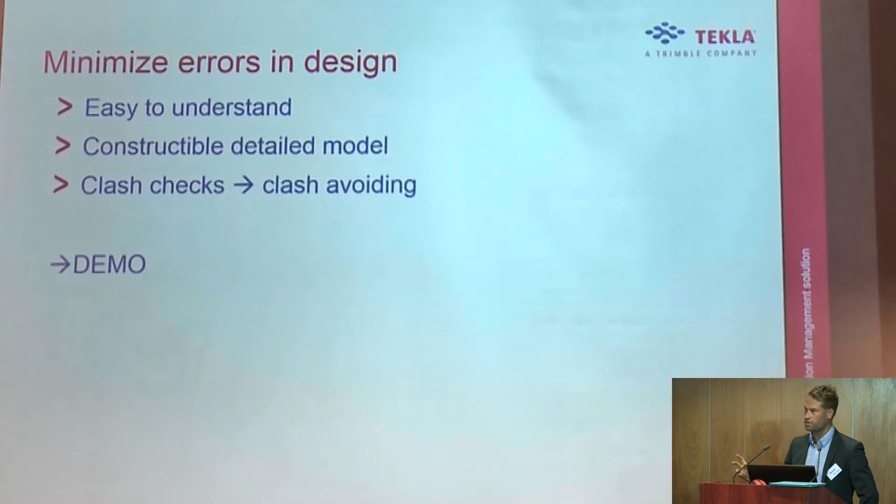First, in the design phase, we want to minimize the error. We heard already how BIM helps, but let's see my point of view about that. It's easy to understand, and also we need the detailed constructible models so we can see that everything fits together, and of course clash checks or clash avoiding, which I'm going to show you soon.

This is one real-life example, not a good one, so that's why I didn't write the project name and the project parties here. Every year we get a lot of different models in this Tekla BIM Awards, and this was a couple of years ago, and sometimes I want to get to know and check the models. This is the roof structures of one building.

We can see that the ducts and the wooden structures are clashing heavily. And if we look a little bit more, we can even notice that there is no easy solution for this. No minor changes, it should be some major change or something. And this was already a designed project, so we know that every project is not perfect.

But this other example, this year's competition, Ramboll Finland and SRV Construction, one of the largest general contractors in Finland, they had this Opinmäen campus project. Also a complex project where they commented that without modeling, it couldn't be nearly flawless design with the modeling. So with the model, it was nearly flawless.

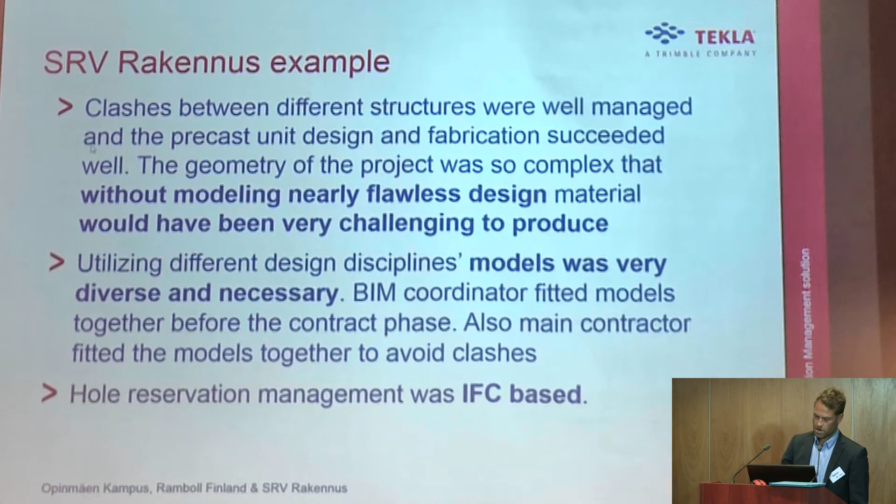The design team did the clash checks, and also the contractor put the models together, and everything was done by an IFC-based system. So here's some example pictures about this project. Everything's detailed, and of course everything fits together. You can see the connection joints.

And this is always the hardest part of the building, the HVAC machine room, top of the building. If you look, it's quite a small picture, but we can still see that there are no clashes. All the ducts are going nicely, but no clashes there.

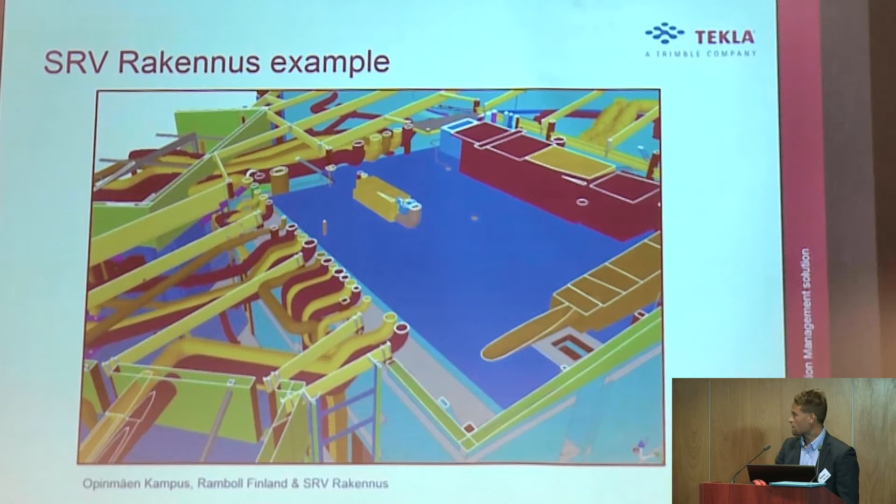But if you look at today's demo model, I have this Ilmarinen model here. It's a quite big project, fully detailed, everything was modeled. Let's check a little bit through how it looks like.

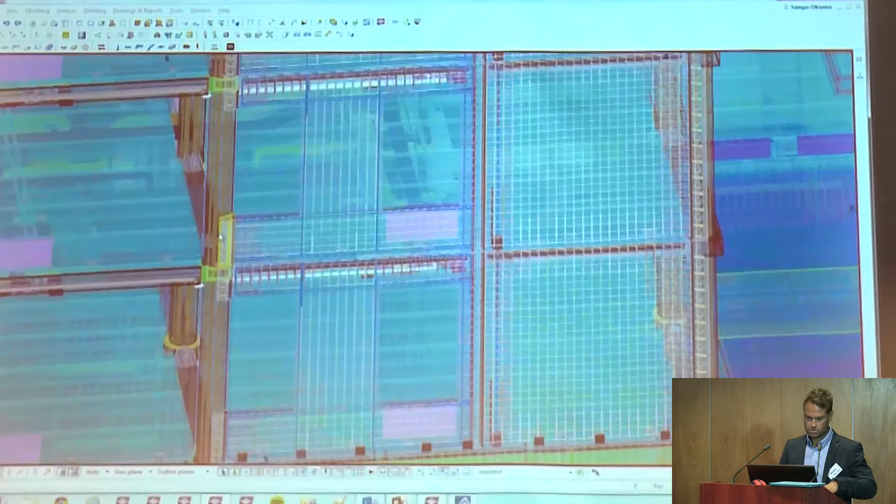Like I said, everything is detailed, so we can see that everything will fit nicely - all the cast in place, all the precast, all the steel. So it's a multi-material project. 3 office buildings in the first phase, maybe 2 office buildings more in the second phase, 2-story basement, and also HVAC and MEP was modeled.

And if we go look a little bit inside the project, we will see that, okay, it looks normal, everything's there. But what they used, the MEP designer and structural designer used this hole reservation, IFC-based hole reservation system in this project.

This is what I meant about clash avoiding. It works that way that the MEP designer creates a hole reservation in his or her own software that he's using, and then sends the IFC as a hole reservation to Tekla Structures. Then the structural engineer can accept or say that it's not, you cannot create a hole in this structure.

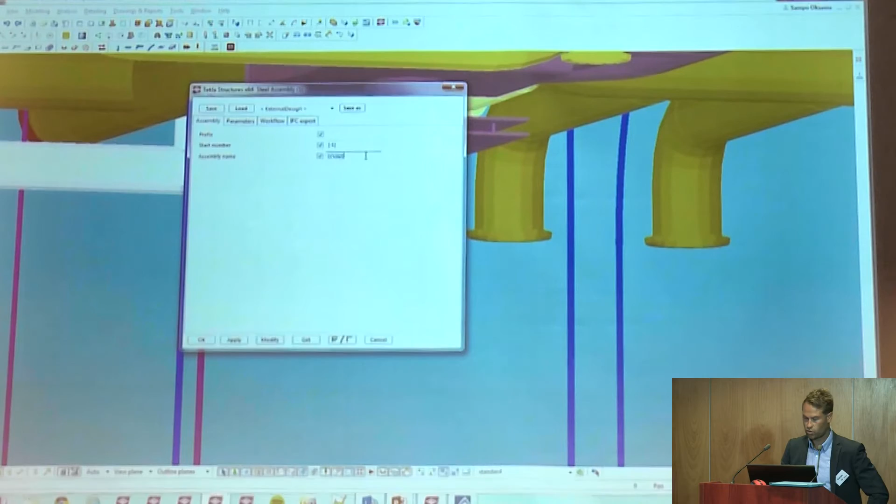Now we can see that this red one is the hole, and then we can see that the ducts go through the hole. We can even click it and see that it's a void - that's the name of the object when it's a hole. Using this, they can communicate and make sure that all the holes are in the correct level and correct location. So of course clash checking is needed, but this is like clash avoiding. If you use this system, you probably will not have that many clashes in the clash checks.

Okay, let's go further. First thing we need to build a building is a foundation, no surprise. But the problem is we don't have the drawings. I've heard this in many projects, that they can still start doing and planning the project. They have the model. They need to have some quantities, coordinate system, reports, materials, that the model can provide.

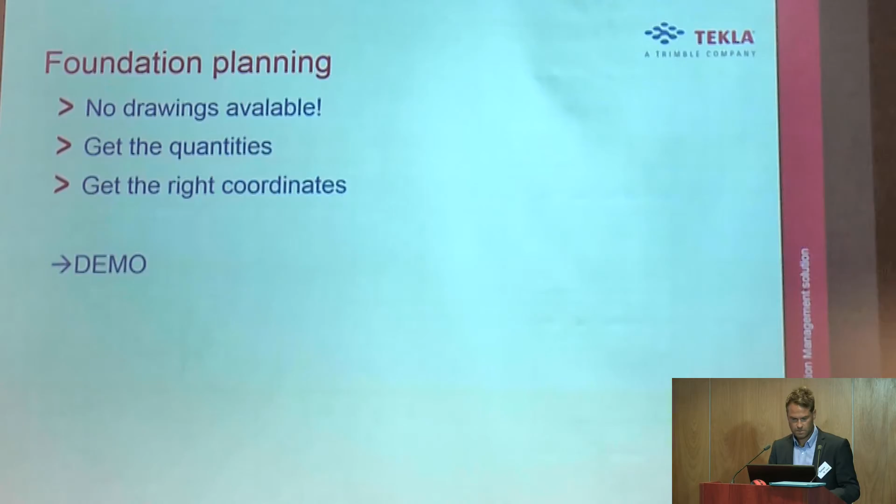So let's see an example. Let's continue with the Ilmarinen project. Let's hide the reference models and the rebars, and let's go deeper to the foundation. Like I said, it looks like quite a basic office building, nothing special, but this way is easy to understand.

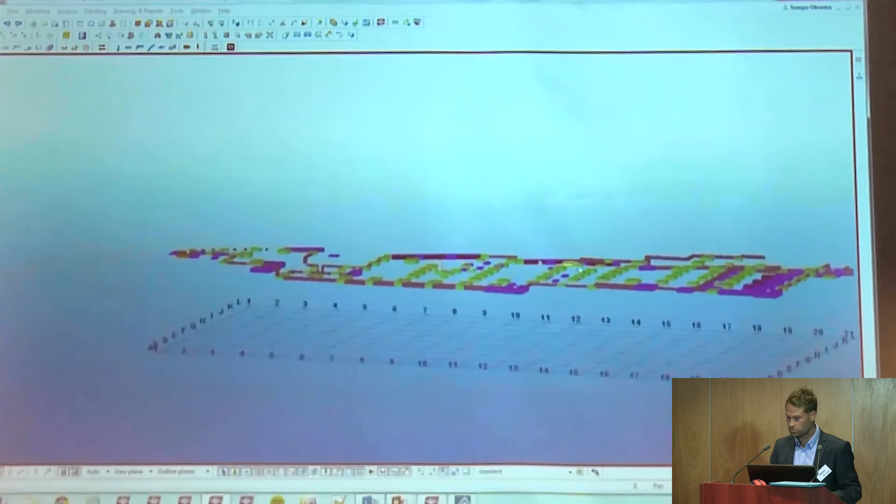Now we start going through the foundation and notice that there's quite a lot of different levels and elevations. And of course, that means there could be a lot of challenges on site also.

So first the quantities. Now I open the first tool that we now have in Tekla Structures 20 in all configurations. So if you're using Tekla 20, you also have the organizer tool, which is the quantity takeoff and information management tool. It's quite small there, but probably the idea will be the most important thing.

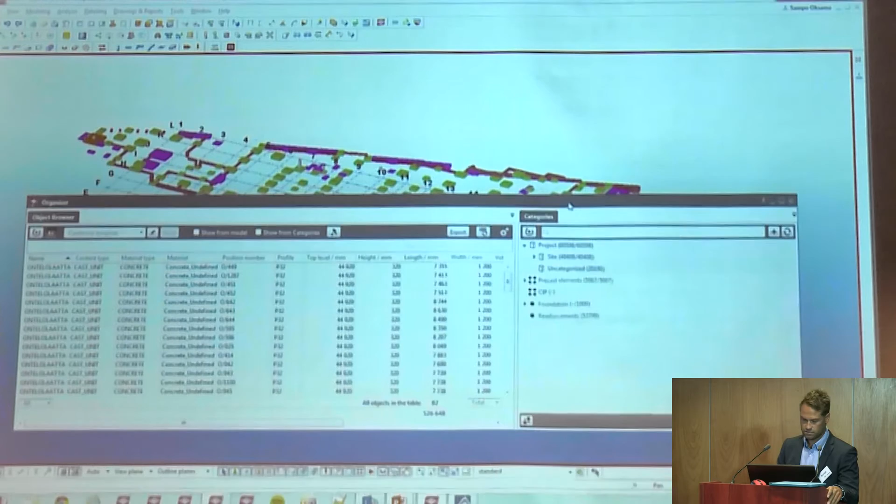So on the left side we have the reporting, all the objects, all the quantities, and on the right side we have the locations and groups that we can customize and create.

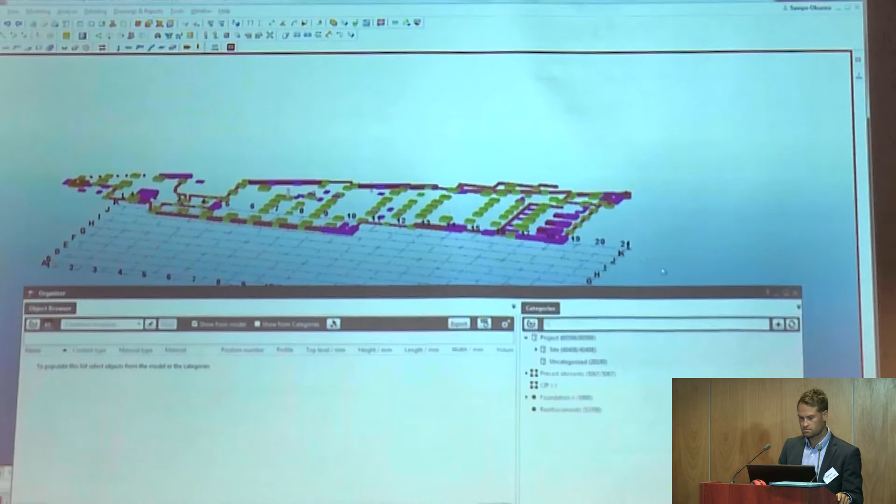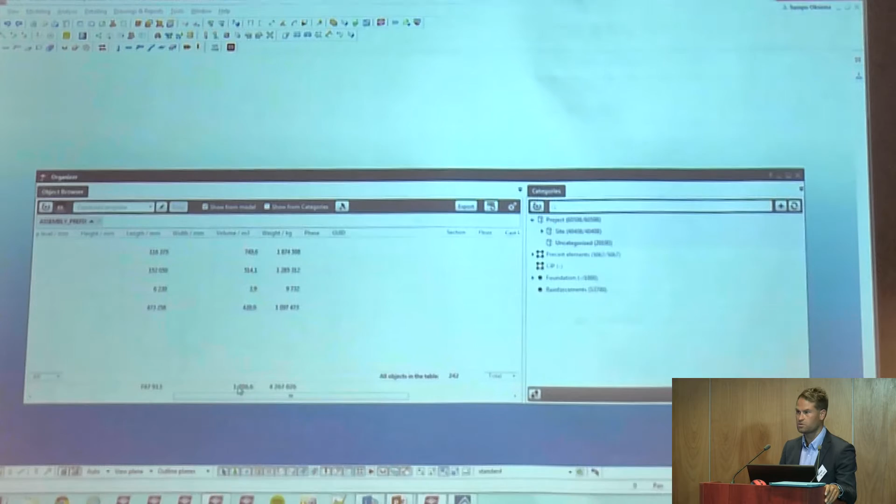So for example, if we want to quickly get the quantities, we can just select from the model. Let's select all the footings like that. Then on the left side, we can easily use the grouping tool and see. We have probably four different kinds of footings, and then we go and see, we're interested about the cubic meters, so 1,700 cubic meters there. So that was the easy way.

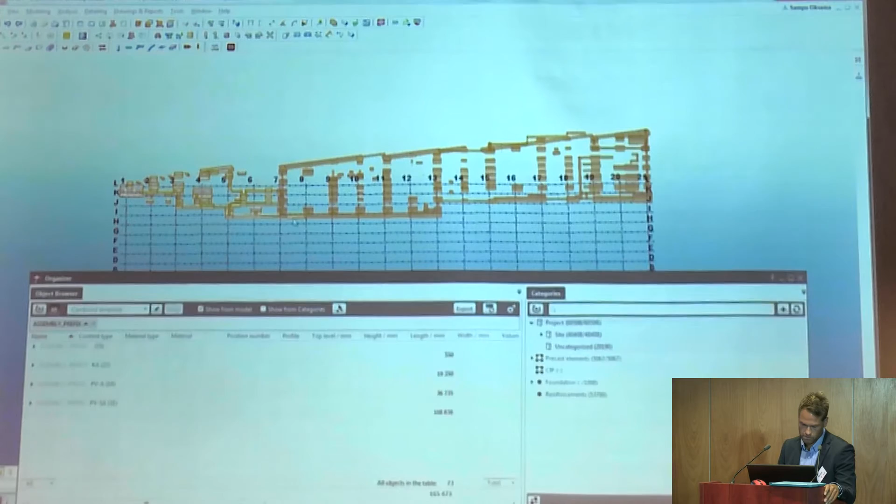Of course, we can start planning. Should we pour or plan this area first, see how much formwork there is, or how many cubic meters of concrete. So we can quickly take different kinds of quantity takeoffs from the model.

Okay, we're also interested maybe about reinforcement. So I can quickly create this group using...

Everything here is organized as rule-based, so it's based on, for example, filters. So if we say that these, based on the name, should belong to foundation, if there's a new object and it's called foundation, it will automatically go into that group. So it's rule-based, and that means it's easy during design, or when you have a new model, to check.

So I created a new group that will check all the concrete parts, and then the rebars. Let's check what kind of result we have here. You can imagine how long it takes to calculate all the rebars from this size of project, from the footings. Let's just wait a second.

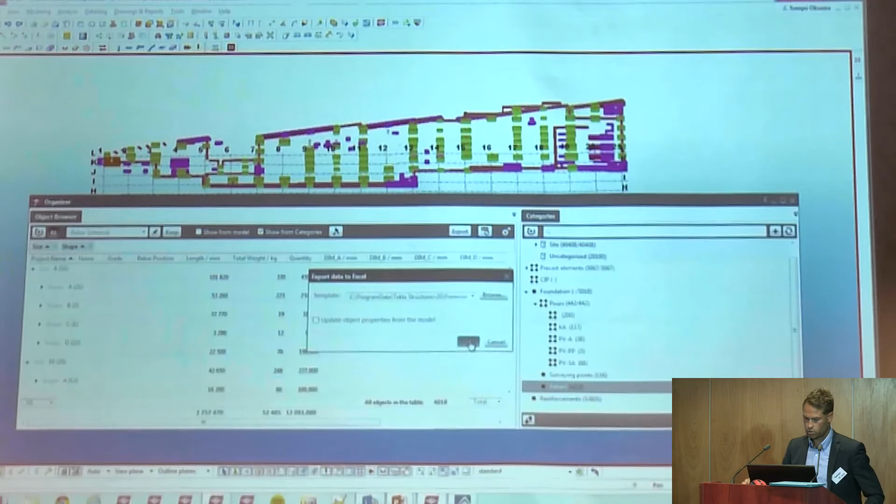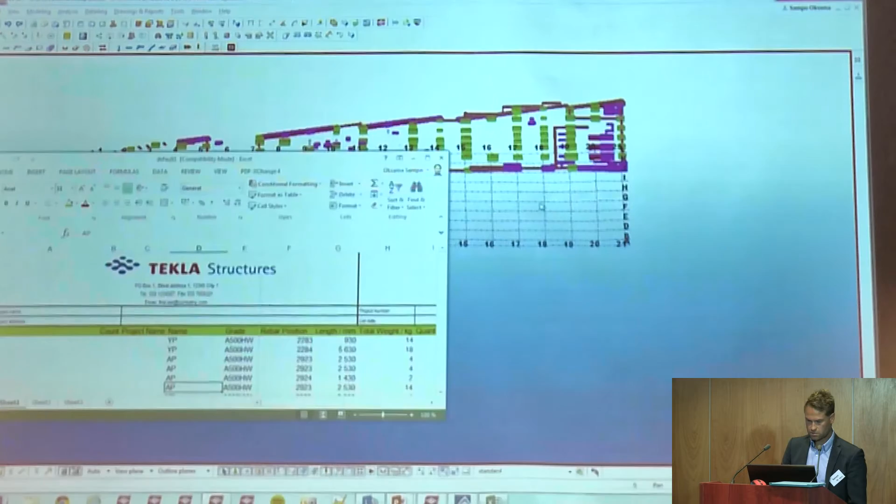Then I create a grouping based on size and bending type, and then, for example, let's export it to Excel. So here we now have an Excel sheet with all the rebars that we have on the footing. And we also have the grouping that we had in the organizer tool. It's still here, so we can easily see that, for example, size 16, we have 36,000 kilograms. So quite a lot of those rebars. Quick and easy reporting to Excel.

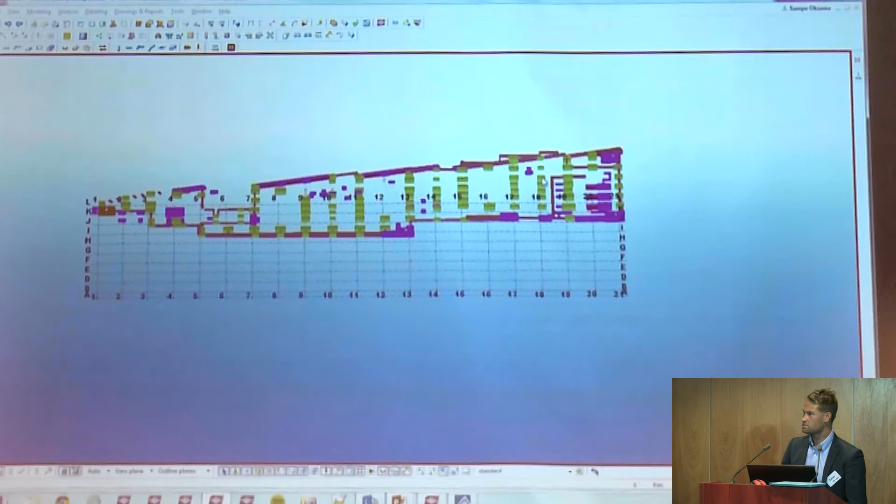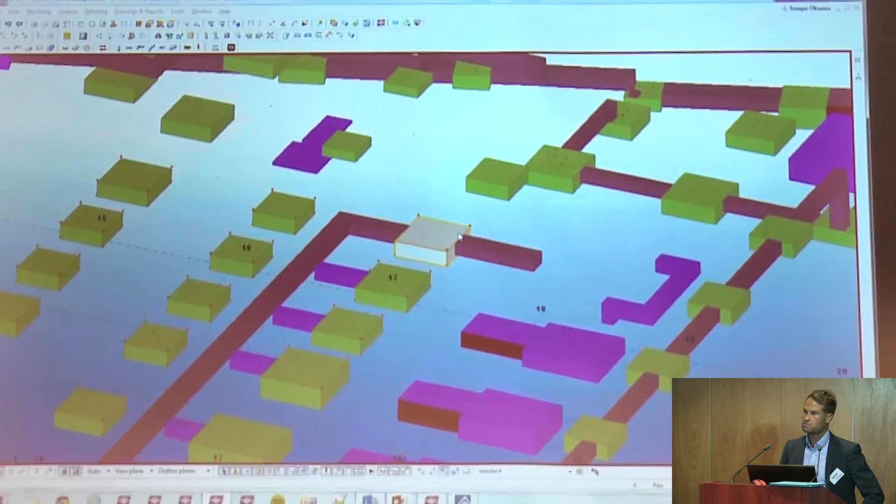And of course, I was talking about the coordinates, and PSD was also interested about this surveying point, measurement points. And like I said, in this project there are a lot of different levels and elevations, so that might help the construction site guys install all the formworks and rebars in the right location.

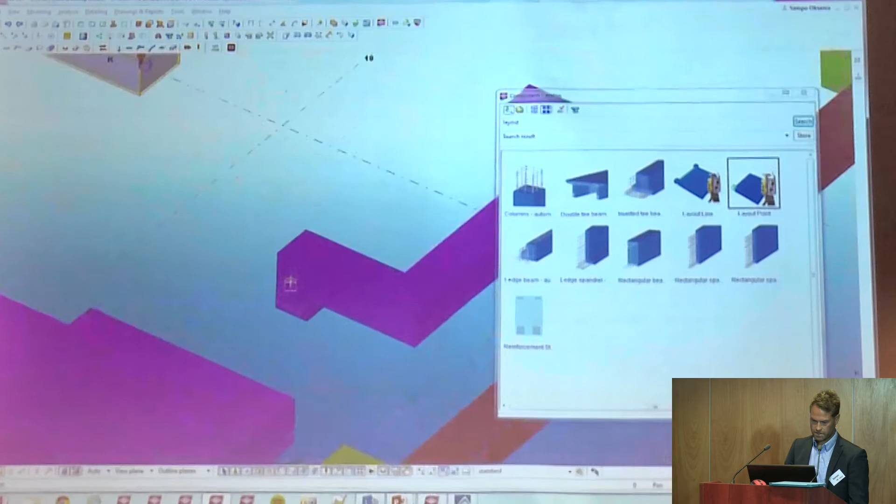So here you can already see that I've created some surveying points. Those can be easily added manually or using components that will recognize, for example, all the top or bottom corner points and add these surveying points automatically. So we can easily see, okay, here there might be some challenges, so let's add some points.

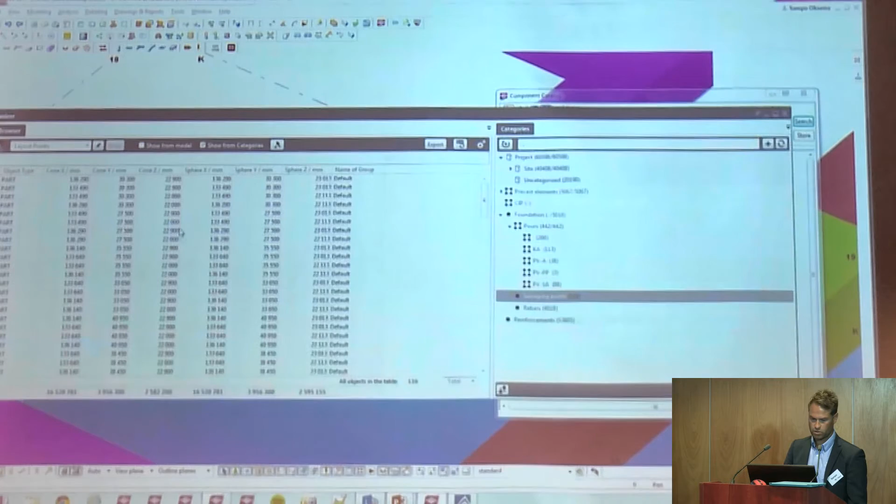And then again, using this organizer tool or some other tool we have, you can easily see the report now here, all the coordinates and the names of the points. And these reports are customized, so you can customize them. Depending on what kind of device you're using on site, you can customize the report and get the information to the machines.

Okay, let's continue with the presentation and some real cases. This is a Destia case, the Destia and SiltaNylund bridge project, where Destia is one of the largest civil construction companies in Finland.

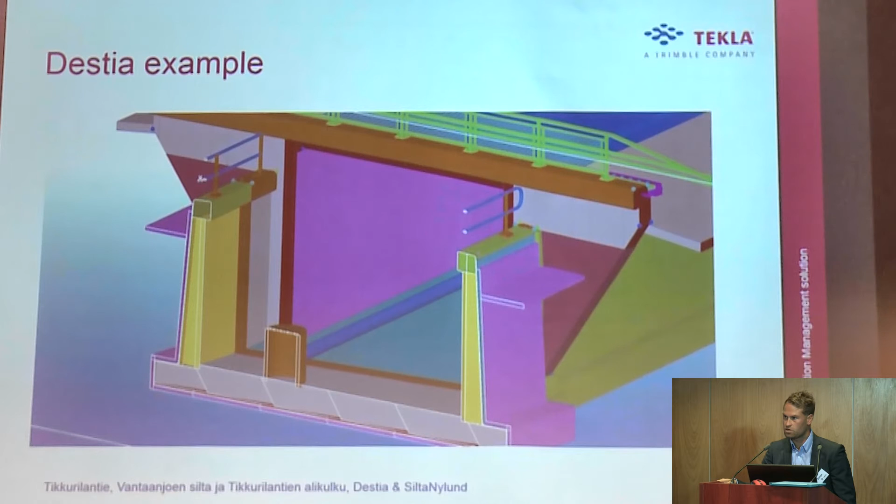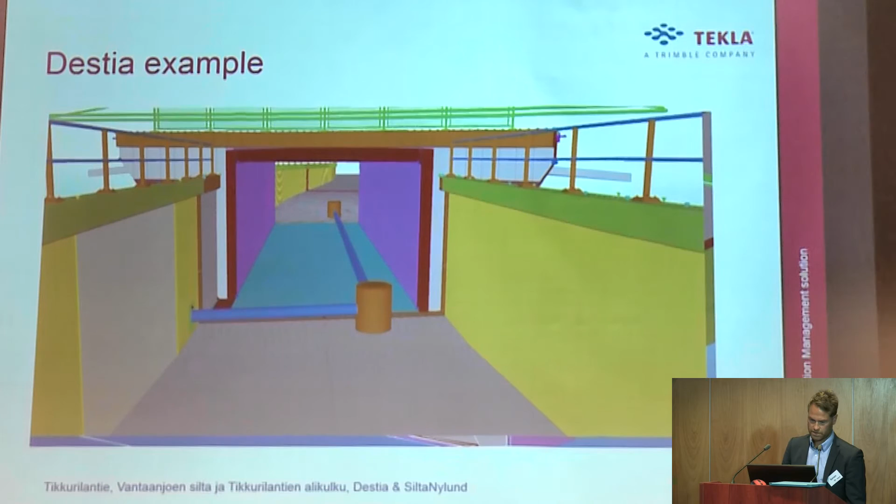It's not a big bridge, but you can see it's fully modeled, including some plumbing, and all the cast-in-place structures fully detailed. Maybe the interesting thing here is that they also modeled on-site temporary structures, supports, or formworks, and there's a lot of surveying measurement points visible.

I know in this case the designer has also added some of these points, but on site Destia also uses Tekla and can add points ad hoc for what they need to get information. There are some details, but also a lot of measurements inside the bridge, since during construction work they need certain points and coordinate information. All the red dots here are the surveying points.

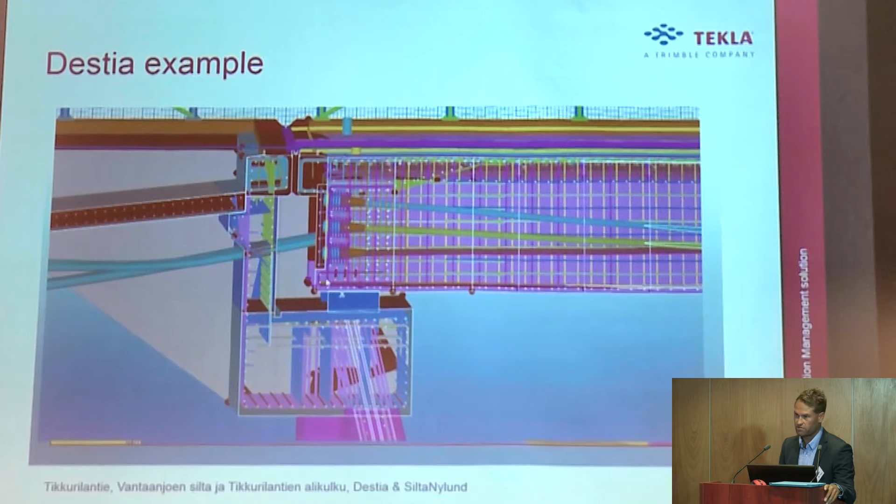Okay, next we managed to build the foundation, and then let's get back to the frame. That's of course the most important part—if the frame is late, the whole building is late.

So the important thing is that Katja showed you how in Vico Office you can create the general schedule based on the model and the real quantities, and then we can continue from here with the daily level installation plan. So the schedule is based on—

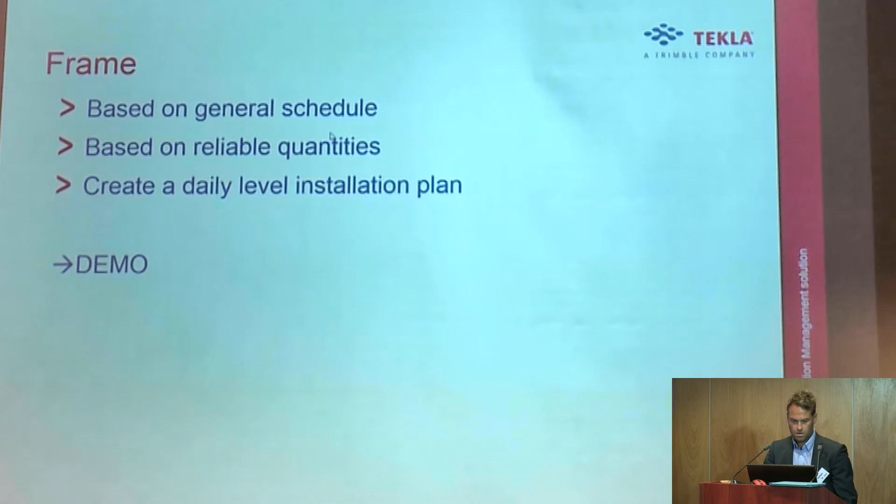the Vico Office schedule. So let's go back to the model again, and let's turn the whole building so you can see it.

Then open the next feature we have for project management: the task manager. That's the scheduling tool we have in Tekla, and it looks like this—a basic Gantt chart schedule that you can see in the task list on the left side and the calendar side here.

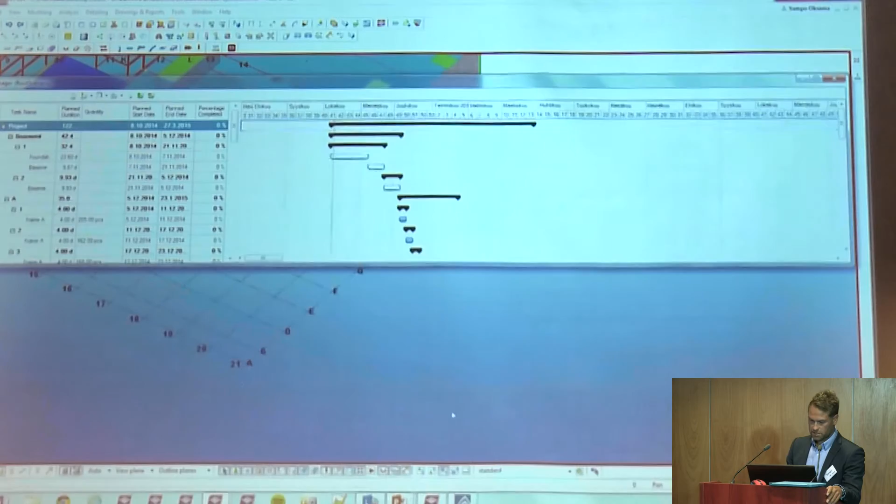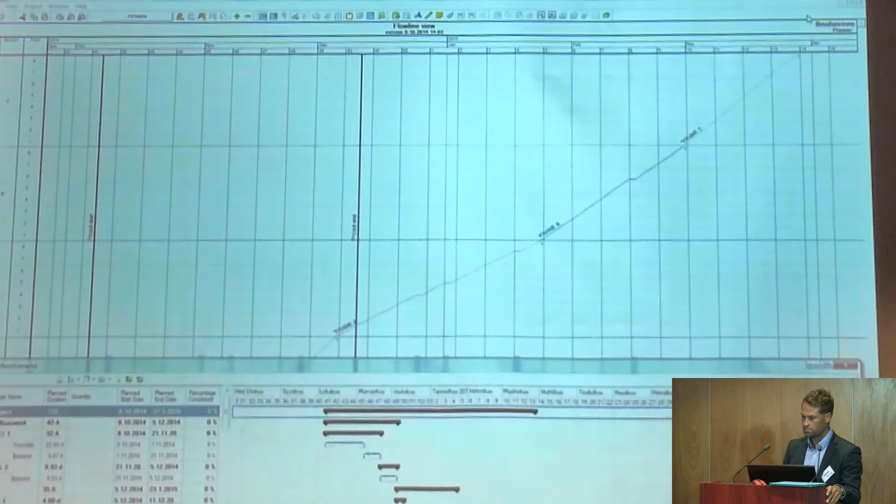Actually this schedule was imported from Vico. So it looks like a flow line in Vico, but when you import it to Tekla, it converts it to Gantt chart mode. So you get the task names, the start date, end date, the duration—all the needed information from the Vico schedule planner into the Tekla task manager.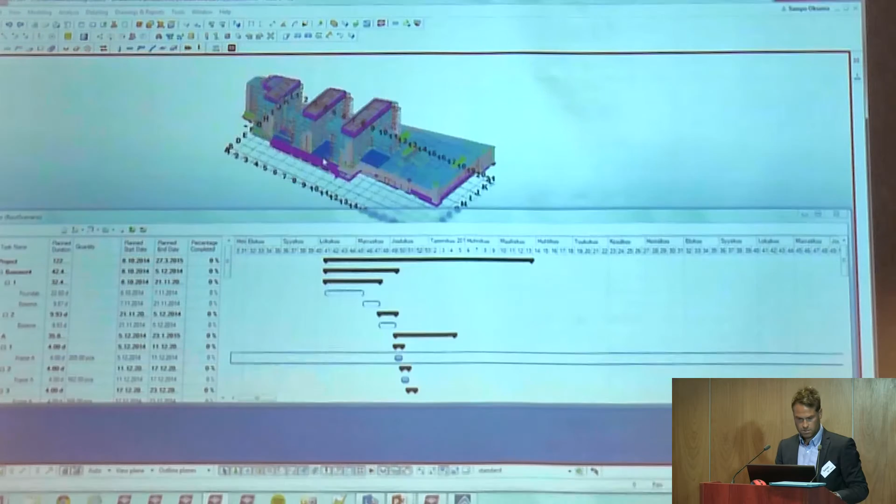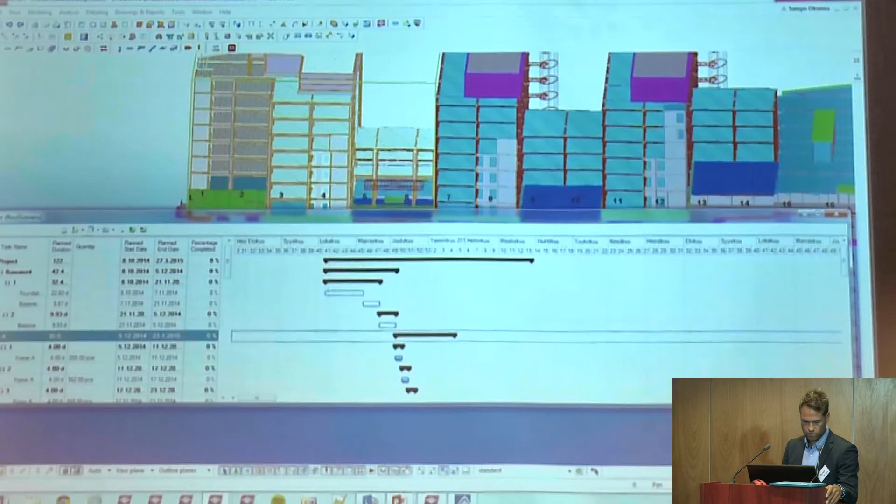And then we can continue going to a more detailed level. Let's, for example, check that we have this building A. We can highlight building A here... there it is. And we can see, let's concentrate now on the first floor, so it will highlight the first floor. We can see that it includes 205 precast elements that we should install.

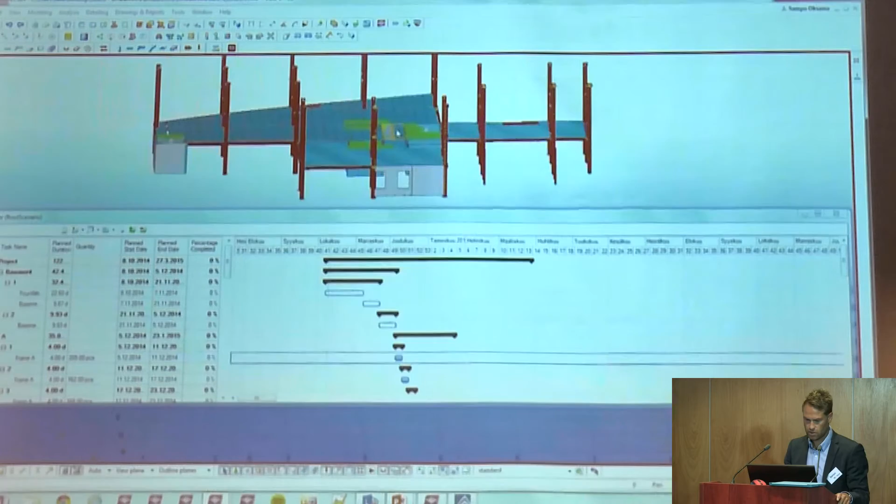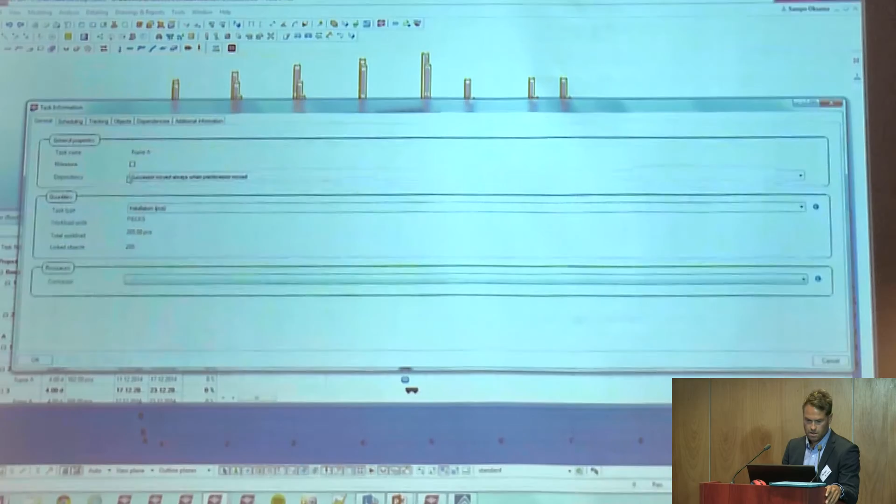Let's go deeper into this first floor. We can hide all the other structures so it's easier to check the situation here. So we can visualize that this is section A and all the precast elements on floor 1 in building A. Then we can go inside that task and check all the precast elements that belong to this task.

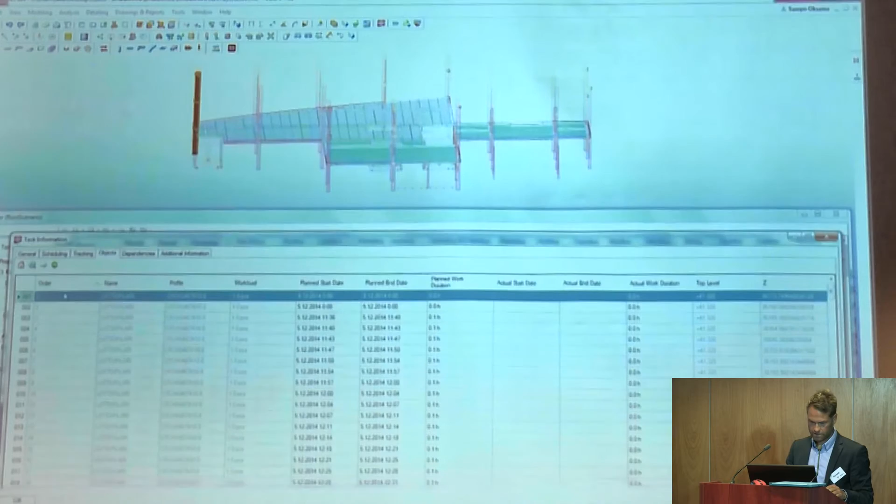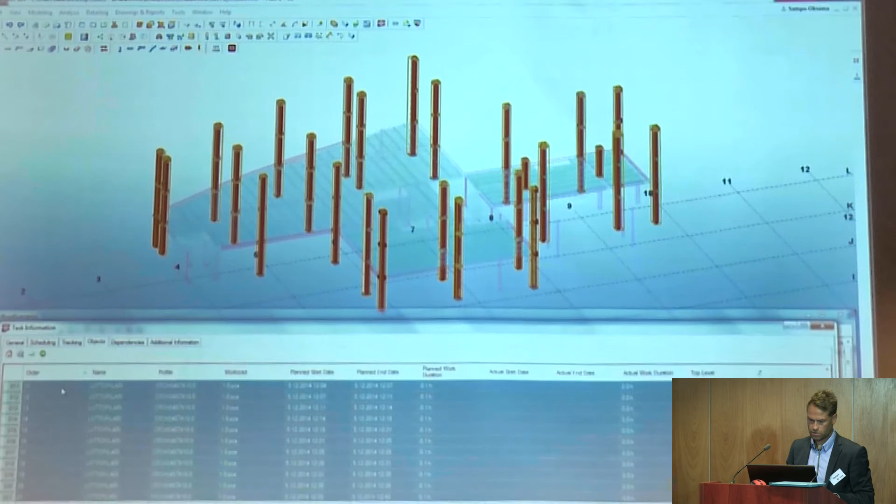What we can do next is start defining the installation order or sequence from the model. I already did it for the first floor, and I can visualize it from here. It starts with the columns—it's a column-beam-hollow core building or structure. So let me adjust this a little. Now we can see that we start with the columns. What's the order? First columns—I manually added this installation order. It could be based on some code or number or something else. Then comes the beams, and last we get the hollow core slabs.

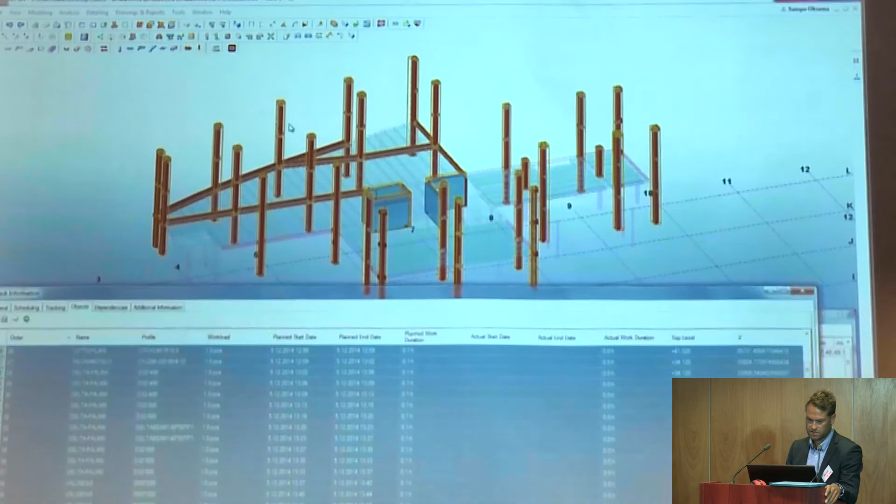So we get the duration from the general schedule and the installation order from here, and then we can calculate the exact date. For example, this column here should be installed on the 5th of December—so we get the exact date. The daily level schedule is now here, and that information we can report or use for many things, like visualization, for example.

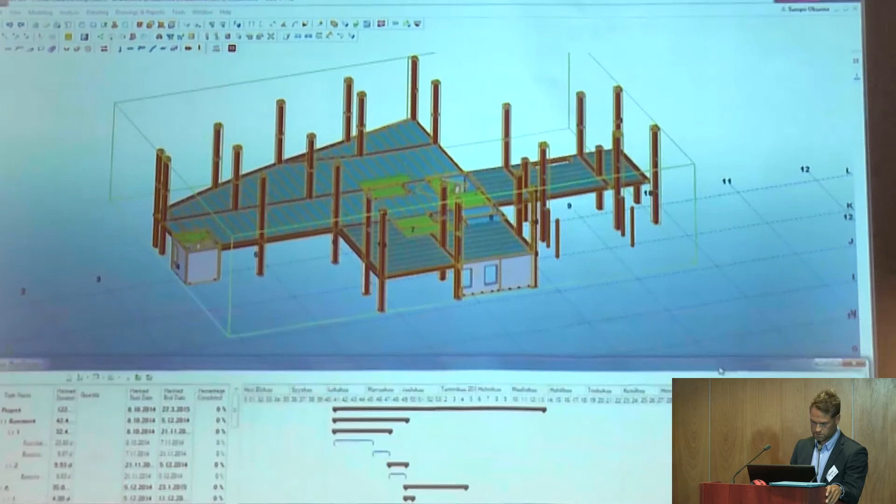Okay, let's get back to the whole building so we can check how the second floor looked like, because the idea was that I didn't add any installation sequence to the second floor, so we can visualize and see how it looks. Is it possible to erect it in just a random order?

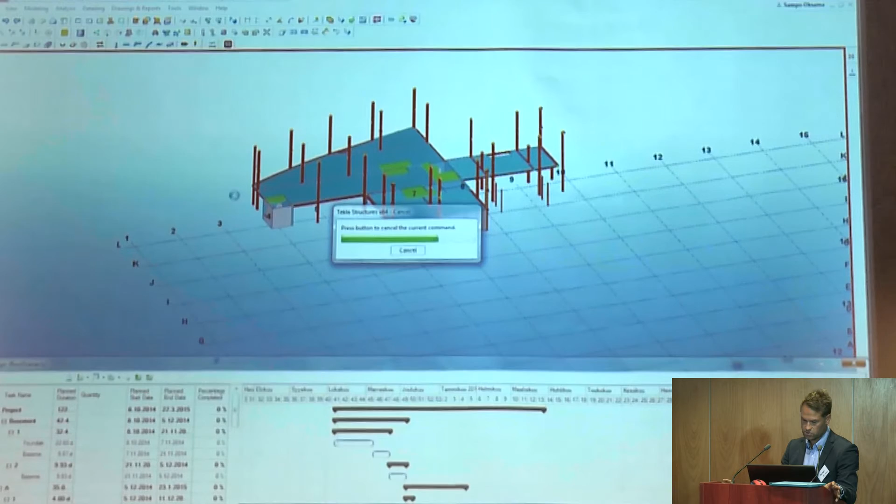Just to visualize this—it's a really easy way to notice which is the correct order. Is it possible to erect it in this order I planned? Let's see. Let's look at all the objects.

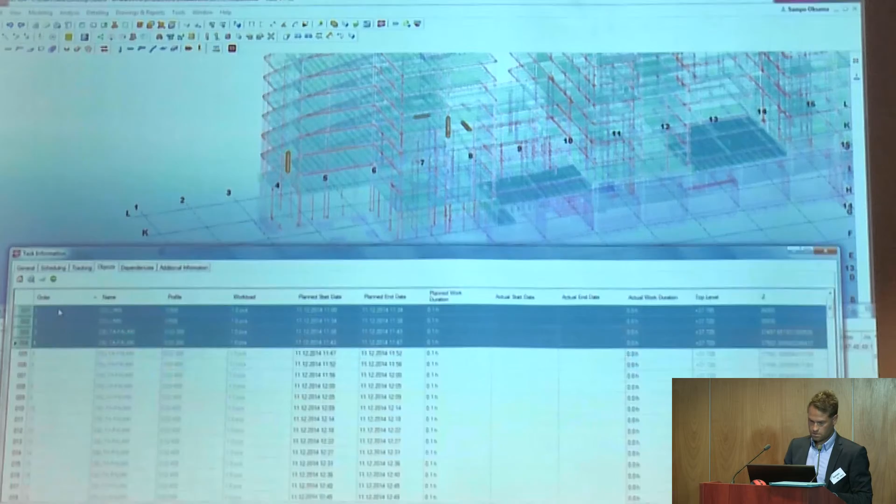Okay, so now it's totally random order, and we can easily see that immediately it cannot be installed in this way. There's a column and there's a beam, and there's no support for that. So it's a very visual tool. You can immediately see, is this the right order for the installation?

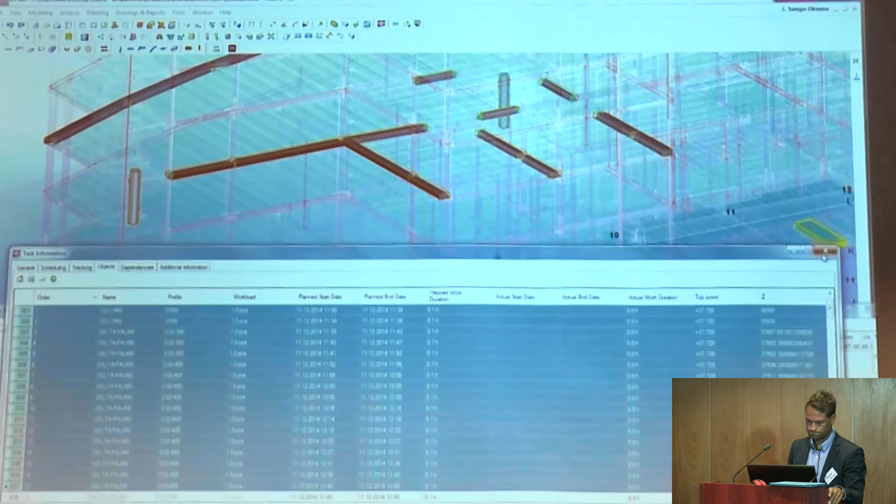Again, you can quickly see on the model, is it possible? Okay, let's go to the next thing.

So we can now start doing the visualization. So that's of course the important thing. Now we have the dates on the objects, and then we can start doing some basic visualization. So now I have a rule-based tool for changing the color for the model.

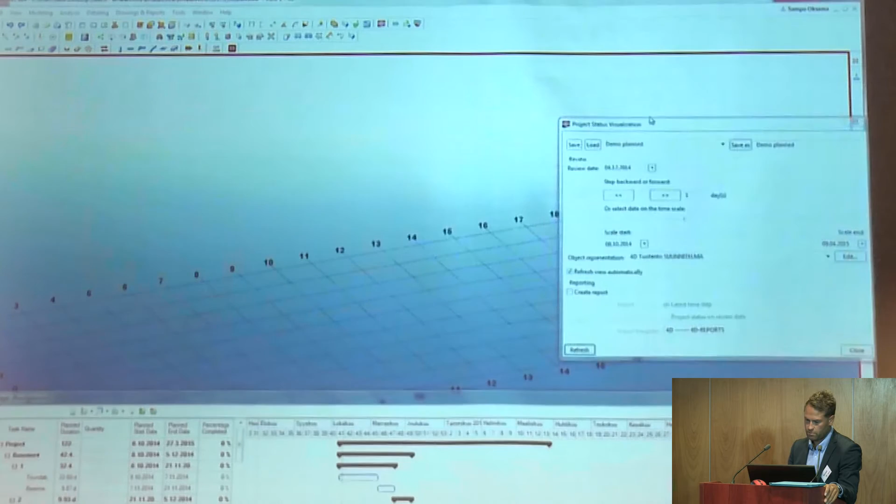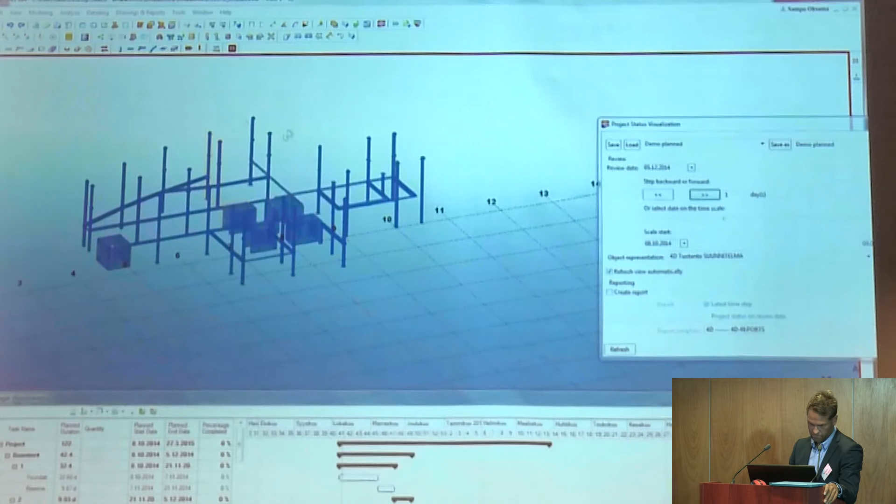So now we can see that there are no objects in the model, but when we start jumping, we can see that on the 5th of December we should install all these precast elements, shown in blue. I know there's a weekend in between, so let's jump a couple of days forward and see that now the hollow core slabs are there. And the next day.

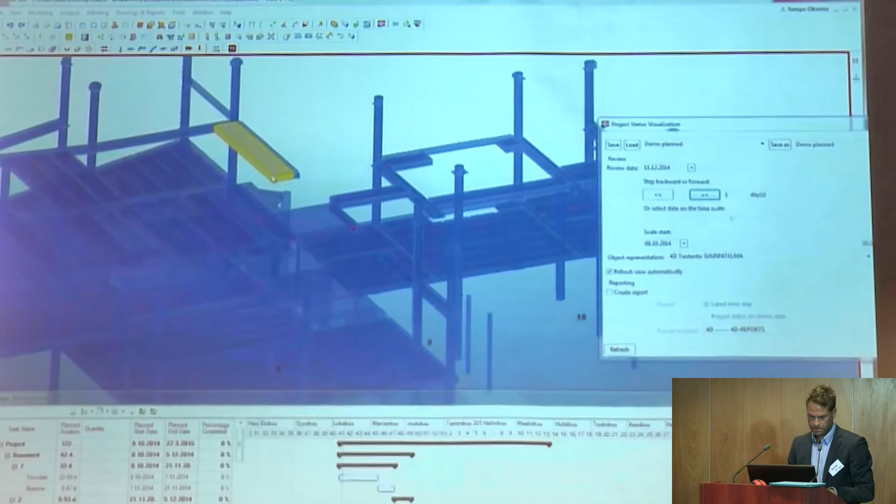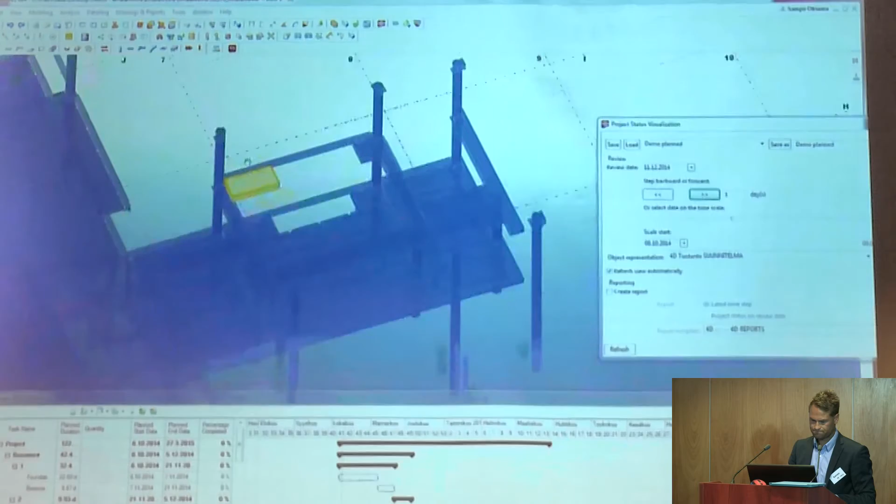Now we will see that the second floor comes, and I didn't add the correct installation order, so we can, for example, see that this column, it's not possible to install here. You can easily see the same here, hollow core, no support for that. Also here, a problem. So it's a visual tool for understanding what's happening next week, today, or whatever.

So we can use this for jumping 1 day, a week, or 2 weeks. It's like a visualization tool for that.

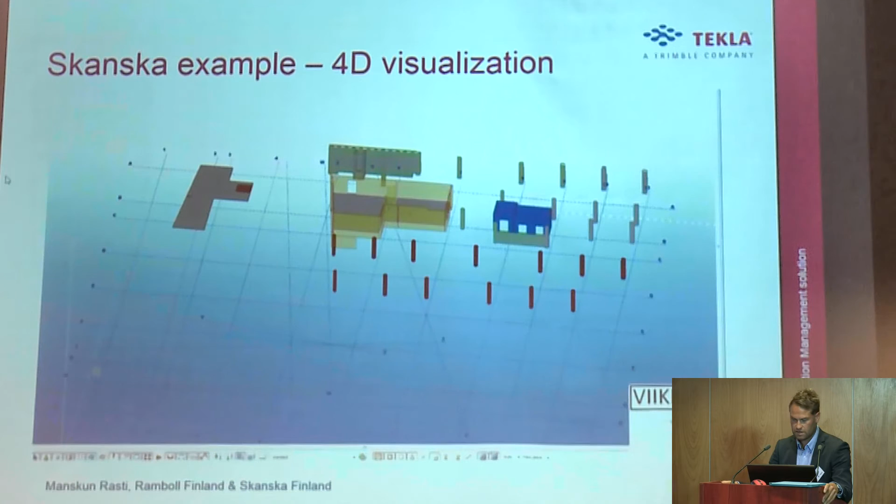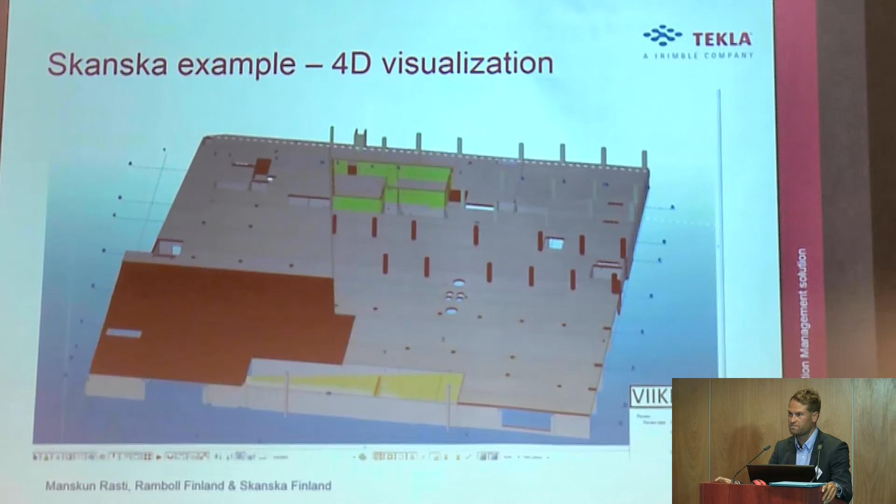This is the Manskun Rasti project, Ramboll Finland and Skanska, a couple years back, Skanska's new headquarters. You can see the week number changing at the bottom right of the screen. Different colors always mean a different thing: green is formwork, red might be reinforcing, and then the actual casting. This is the visualization for the basement. It's actually quite a similar kind of building to the Ilmar project that I'll be showing you also.

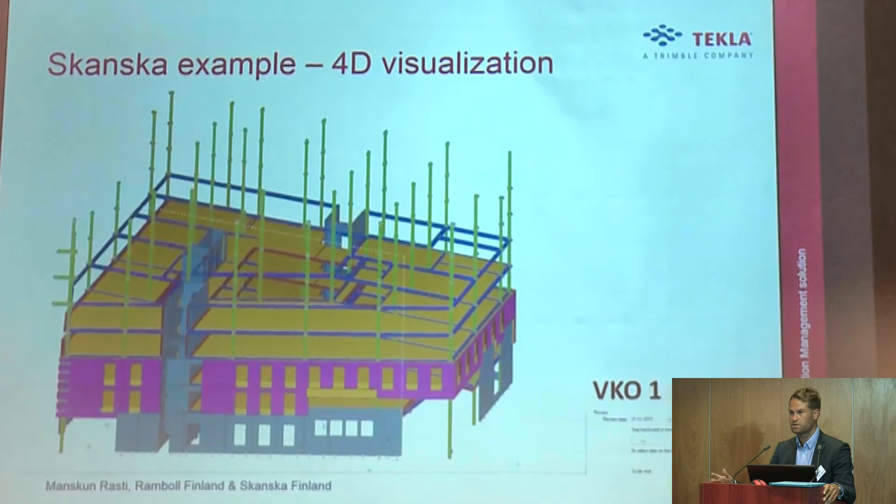In the next video we can jump to the precast frame visualization. They also use this, as we're talking about today, for communication. This is a great way to communicate what happens this week, where the installation is ongoing. It's also a safety thing: if you know that installation is going on in that corner, don't go there if you are not responsible for the installation.

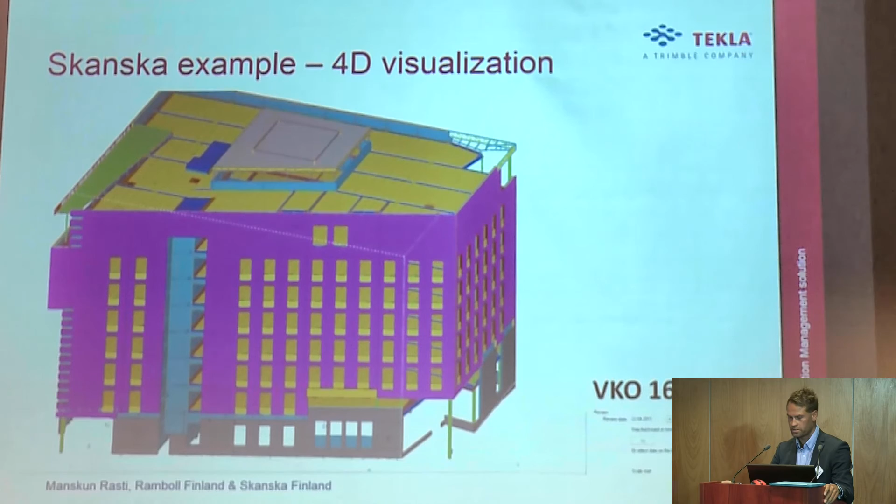Next thing: now we've been doing the scheduling for the object level and the daily based schedule. The next thing is, of course, controlling it and following the progress. Let's get back to the model and, for example, select from the model that these elements we already installed, and we installed them on the date we planned, so we're on schedule.

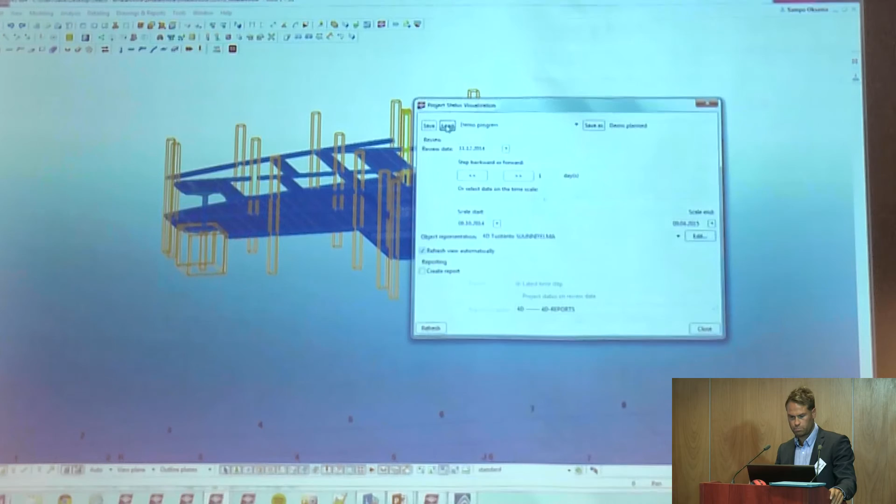Then we just change the color setting to show the progress tracking, and we'll get another visualization of that—again a very visual way of showing things. So the blue things are already installed, and we can see for each object that it was planned for the 5th and it was installed on the 5th.

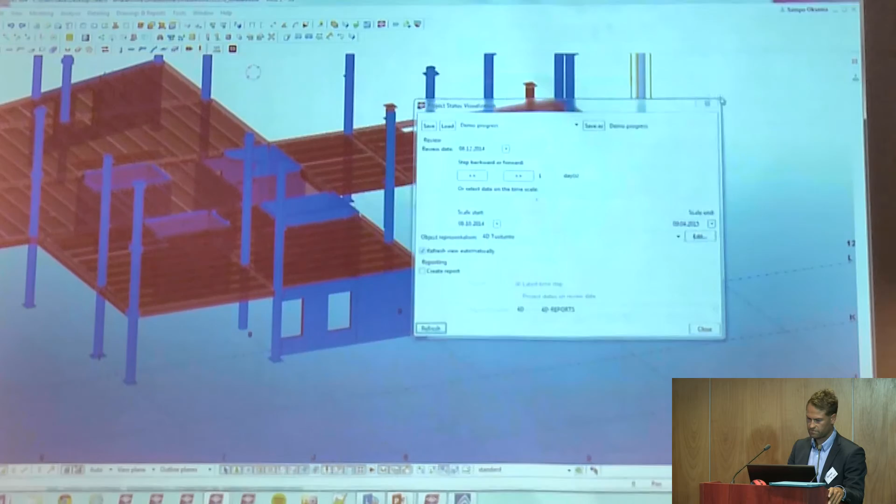What about the red ones? Let's select one: it was planned for the 5th, but there's no information that it was installed, so we know it's probably late. So we can quickly see that the red ones should already be installed, but are not. Again, a visual way of showing it.

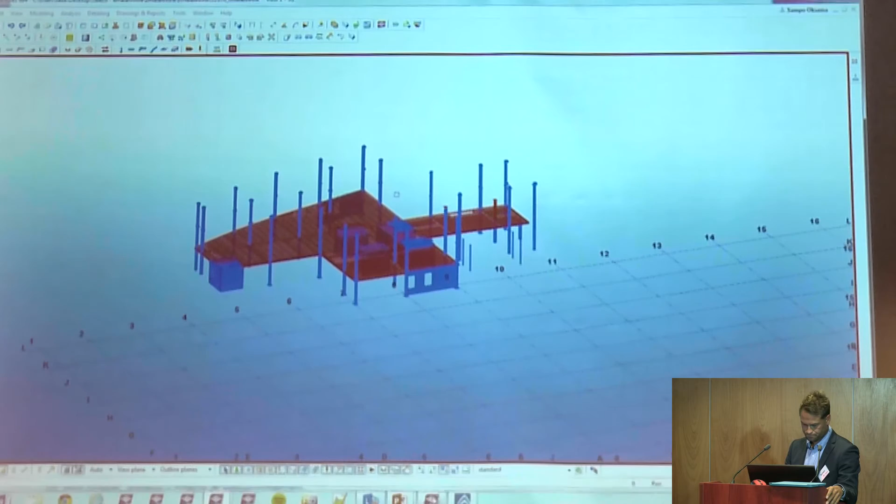Sampo, one question: is it possible, let's say on site, to enter data about actual erected or not erected elements? Only a manual way, or?

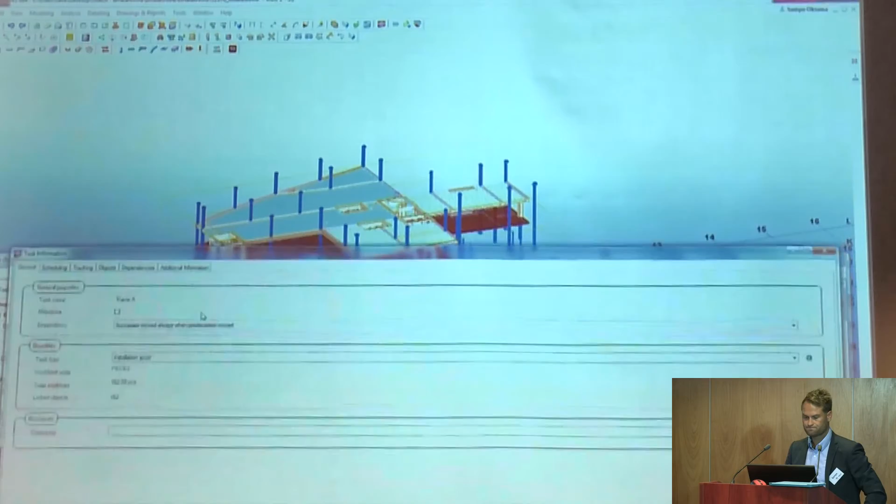Yeah, there's a different way, good question. One way is that you can manually add the date to each object. Another way is through the task manager, where you can also add the dates—here's the start date and end date.

But one good way also is that an Excel template can be used. If you create this Excel template, you can read the data straight from the Excel template into the model, and it's a quick and easy way. So normally if your subcontractor fills in the template, you just read in the data and get the color settings and information correct.

There's a question: is it possible to somehow connect this software with warehouse software, a database, so that material or a part which is going out from the warehouse is directly reflected here?

Well, we have many integrations with different ERP systems, so probably yes. Of course it depends on the interfaces that the other system has. We are quite open software with integration with many systems. For example, in Finland, one precast fabricator sends fabrication information straight to Tekla each night. So there are a lot of different kinds of integration—yes, it's possible.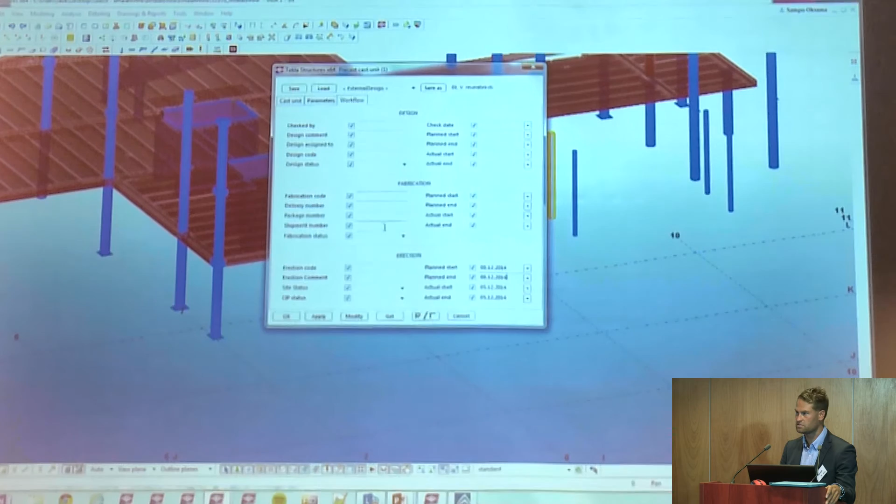Okay, so for example, each object has this workflow page where you can see the design, fabrication, and erection phase information. For design, we have own date fields, also status, is it incomplete or completed. For fabrication, we have much more - it could be in warehouse, it could be in assembly, or it could be shipped to the yard. So there's a lot, and this can also be customized. Today I will only be showing this erection phase, but you can also follow and plan the design and fabrication phase with the same tools.

Okay, then the last phase in the project, of course, is the internal phase. We know that there's a lot of internal works, HVAC installations, internal walls, and all the things. So first, of course, clash check should be done, but there's still information needed, measurements and visual checking. That's what PST also mentioned, how they used it.

Here's again a Skanska example, what kind of BIM tools they use on site. Solibri Model Checker they also mentioned they use for design coordination. They use Tekla Construction Management solution for scheduling and progress. Tekla BIMsight or Viewer for viewing the model. And then the latest one is the mobile app - Tekla Field 3D is the mobile app you can use on iPhone or iPad.

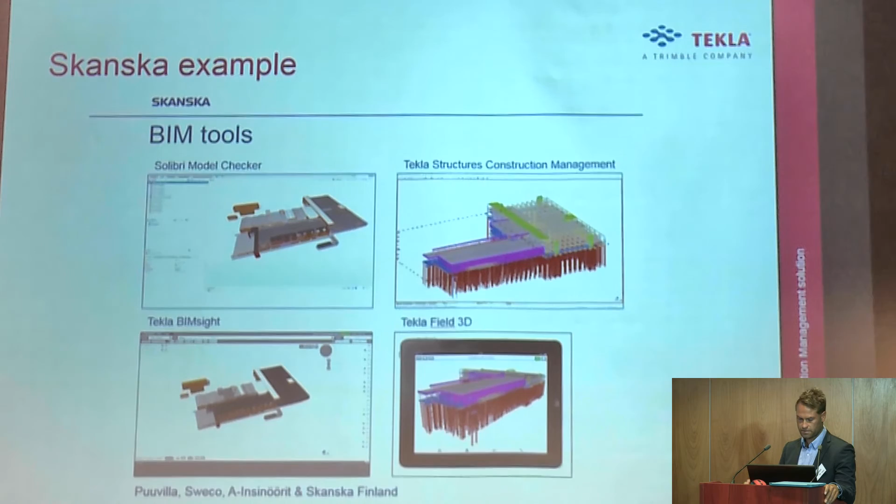And that you can easily visualize the model when you are on site walking around. And these kind of things, of course, in daily work when you're on site, you need to see all the connections, all the details. You need to get some measurements for the pipes or ducts. So this kind of information you always need.

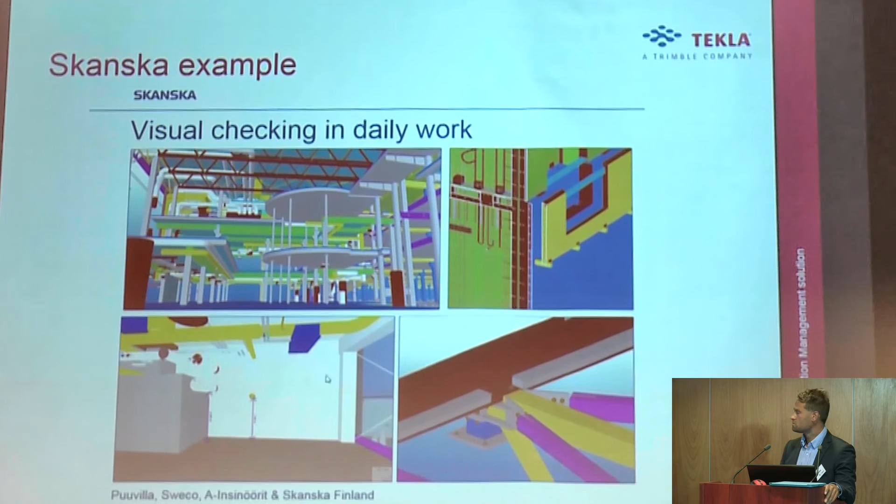And Skanska uses this field BIM, so they have different solutions for this, also iPads, mobile phones. They call this BIM kiosk - it's a computer on site that everyone can use. But maybe the most important thing is how they use mobile phones or mobile applications on site.

So let's take a video, how it works and how they use it. Now let's see.

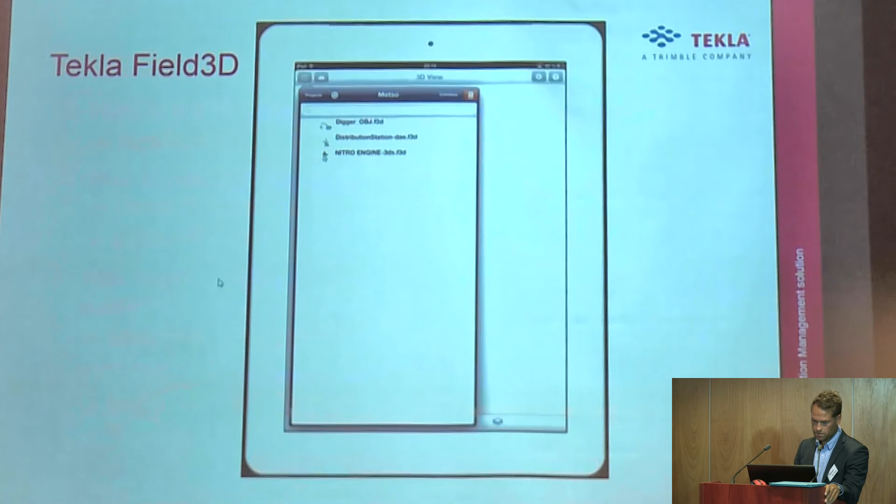Okay, so that was the Tekla Field 3D. That's quite new and probably you've all heard about it. So if I had time, I could quickly show a little bit about that. So yeah, let's try it. It's a viewer - it's actually based on also IFC, so it opens all kinds of IFC files. It's really quick, even quicker than some other software we can provide, but this is really quick, and big models, fully detailed models you can visualize and view.

We have the same tools that Tekla BIMsight has, for example, clipping, cut planes, measurements, walk inside, and the measuring is also easy and handy there. And that's what I think they are using quite a lot on site, like they said in the video. And we saw also in the video, so it's not about the age, or it doesn't matter if you don't have the same language, you can talk. If you can see the model, you can understand both what's happening.

And if you want to see it in real life, I have an iPad here, and during the coffee break you can come and try it. It's so easy that probably everyone can use it straight away.

But at the end of the presentation, I just want to mention a couple of things. So the solutions - these were the challenges, how to get to know your project and identify the possible risk. Of course, the model and the information is the solution for that. And how to minimize errors in designs - it should be a detailed model. We see when it's detailed, everything fits together. Clash avoiding, clash checking, of course, that's the most important thing. And how to get the reliable information, even if you don't have drawings - you can use the model, you can use the location-based quantities.

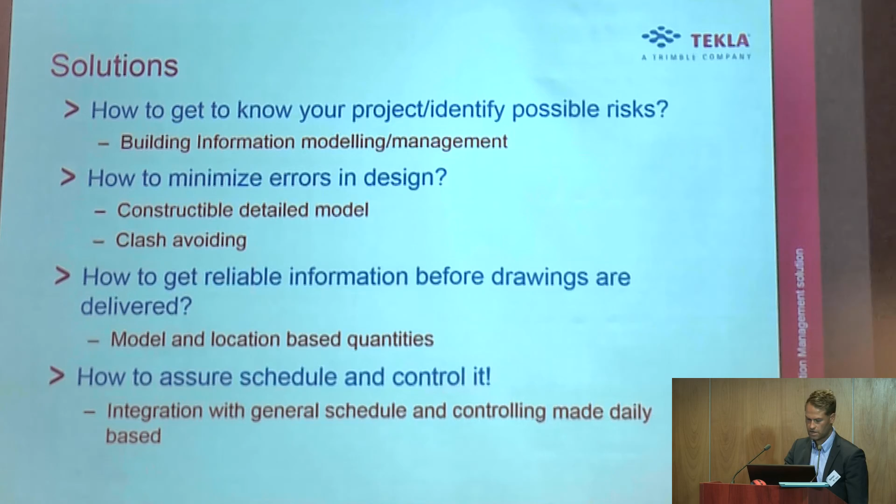And of course, if you want to make sure that your building is on time, you can use the general schedule, integrate with, for example, Vico Office, then control it by daily level in Tekla. So that's the solution for that. Thank you. Any questions?